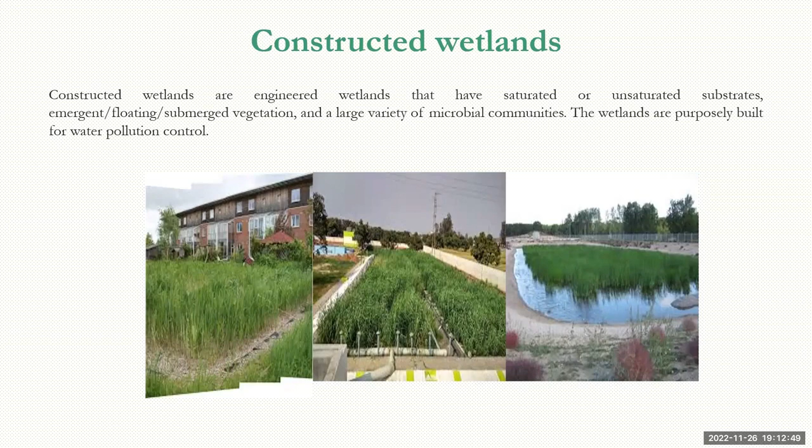So here I'm showing you some examples of constructed wetlands. These can be classified into 3 groups, but I will talk about it actually in 4 groups. So number 1 is vertical flow, and number 2, horizontal flow, surface flow, and floating wetland.

Now this vertical flow and horizontal flow are defined as subsurface flow. Subsurface flow means wastewater is moving beneath the media, so you cannot see the flow of water. We will see, okay, it's a very beautiful garden, very nice, but if no one tells us, we will not be able to understand that it's a treatment system. Whereas in surface flow, we can see the flow of water, because wastewater is flowing above the media.

This is very similar to the natural wetland that we see here in Bangladesh, or maybe in other parts of the world. And a very new system is floating wetland. Here the wetlands float with the help of an air buoyant mat, so that the mat floats on water, and the roots grow inside the water column, and bacterial removal occurs in the root. So basically, there are 3 types of wetland: subsurface flow, that is vertical and horizontal, then surface flow, and then floating wetland.

Now this vertical flow, why do we call it vertical flow? Because wastewater flows vertically through the media towards the outlet, meaning wastewater is flowing under gravity. That's why we call it vertical flow. Whereas in horizontal flow, wastewater flows horizontally in saturated media, the media will be totally saturated, so we call it horizontal flow wetland.

Okay, so now I will talk about a few of my research works that I have done in the last 10 years. First of all, I will talk about the conventional treatment systems. These systems, vertical, horizontal, surface flow, floating wetland, these are conventional. They have been introduced 2 decades ago, or maybe 3 decades ago. So we have implemented these in Bangladesh.

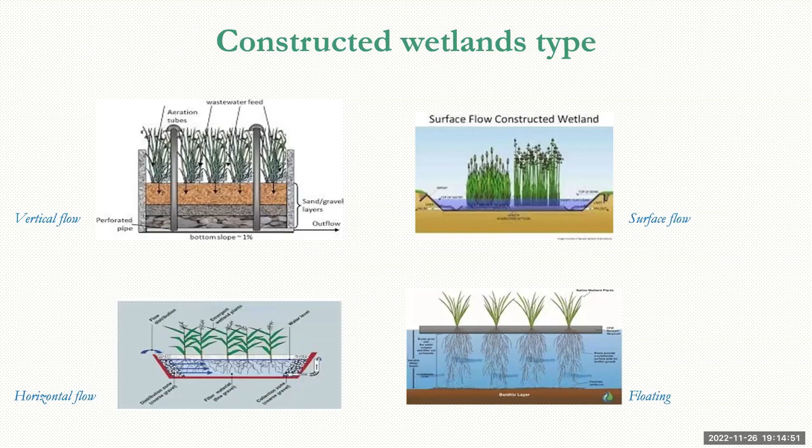This is the first reported study of a wetland system in Bangladesh, published in Chemosphere in 2012, a decade ago. We treated tannery wastewater. We all know tannery effluent is very harmful—it destroyed the river Buriganga. It's very difficult to treat because the chemical and bacterial composition is so complex.

Even traditional systems like the activated sludge process require very intense monitoring for successful treatment of tannery wastewater. This work was done in 2011 when I was at Ahsanullah University. We employed a 3-stage system: first vertical flow, then horizontal flow, then vertical flow again. The media selection is very important because it fosters the growth of microorganisms, absorbs and filters pollutants, and promotes plant growth. Many complex mechanisms occur inside the wetland system.

We considered coco-peat, or coir, a waste product. For the horizontal flow wetland, we used cupola slag, a waste product from the iron industry, and then pea gravel, small gravel available from construction sites in Bangladesh.

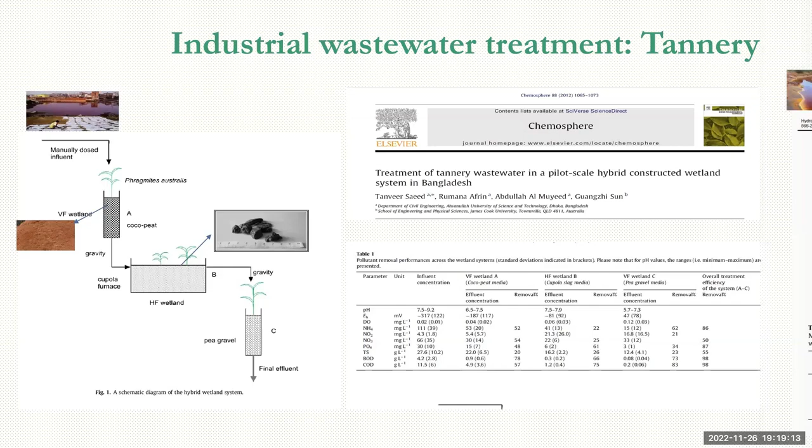Our next study, done while I was at Ahsanullah University, focused on textile wastewater, another dangerous effluent. The main component of textile effluent that destroys the environment is dyeing and coloring compounds. This work was published in Bioresource Technology.

Here we again employed vertical and horizontal flow wetlands. In the vertical flow wetland, we used sugarcane bagasse, a waste product—akhet chobra. In most of my research, I focus on waste products, turning waste into reuse, waste into resource, so it becomes a resource for removing contaminants.

In the following horizontal flow wetland, we used Sylhet sand, a very cheap material found at construction sites. Again, the results were very promising.

The ammonium concentration in the textile effluent was 158 milligrams per liter, COD was 12,625 milligrams, and BOD5 was above 2,705 milligrams per liter—absolutely lethal. The effluent discharge criteria under the ECR 1997 guideline for inland water bodies is about 40 milligrams per liter for BOD. There's no comparison between 40 and 2,705 milligrams per liter.

The interesting thing is, in one system we use recycled brick, that is, brick from a demolished structure. We resized it according to our requirement and used it in one system, and in another system, sugarcane bagasse. We found that the recycled brick produced more promising results than the sugarcane bagasse, because the recycled brick has many chemical components. We will see this later in the EDS analysis.

We have the EDS analysis, but due to space restriction, I couldn't show it. It has many chemical ingredients, for example calcium, aluminum, iron. These elements promote the adsorption of phosphorus, and also these media are very porous and rough, so they promote the growth of bacterial surface. We will see this in the SEM analysis later. So this is a very effective media.

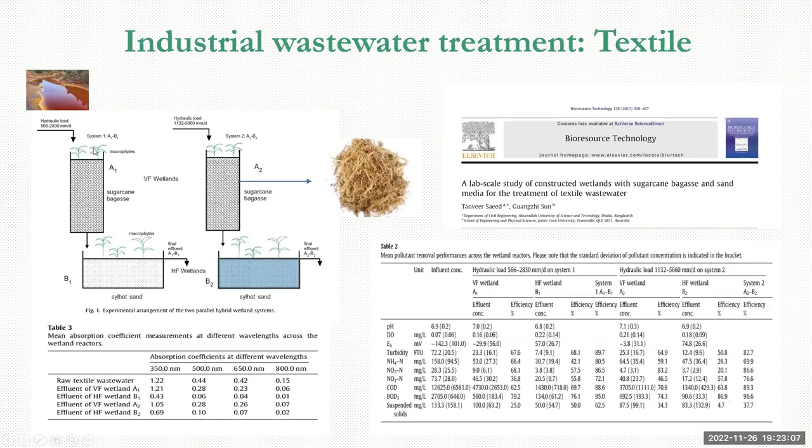And here we have used Canna indica plants. In the previous two research works, we used Phragmites, a very common plant we find in Bangladesh. The results are again very promising. We have achieved almost 80 to 85% removal from the industrial wastewater.

If we look at the effluent concentration, the COD effluent concentration was 1098 milligrams per liter, whereas it reduced to, in this system, from the first to say 184 milligrams per liter, almost 75% removal. So very good removal. And again, another dangerous pollutant, total nitrogen, was 17.3 milligrams.

But at the end point, in this system with the recycled brick, we got 3.4 milligrams per liter. Color removal was also sufficient in terms of platinum cobalt. Color was 1197 platinum cobalt, and at the effluent it was 209 platinum cobalt.

So this research bridges structural engineering and environmental engineering, because brick is a structural product. Civil engineers consider brick as a structural element, but here in this research, we have shown that the structural element can also be used in the environmental division. So it bridges the two divisions of civil engineering.

Now we will talk about floating wetland. In our previous three research works, we talked about subsurface flow, that is vertical and horizontal flow wetland. But there is another form of wetland, that is floating wetland.

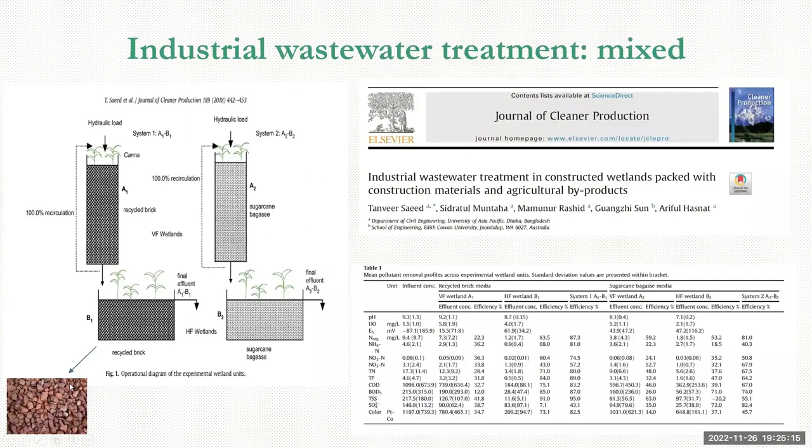So actually, this root acts in lieu of media in the floating wetland, and the whole system is floating. That's why we call it floating wetland.

This floating wetland is very applicable for Bangladesh, particularly for industrial wastewater treatment, because we know industries dispose wastewater that comes through a channel and then meets the river. If we put the floating wetland barrier in those channels, it will reduce the pollutant before it goes to the river. And we know that river has a self-dilution capacity. Once the pollutants have been reduced, the river, due to its natural capacity, will remove the remaining pollutants.

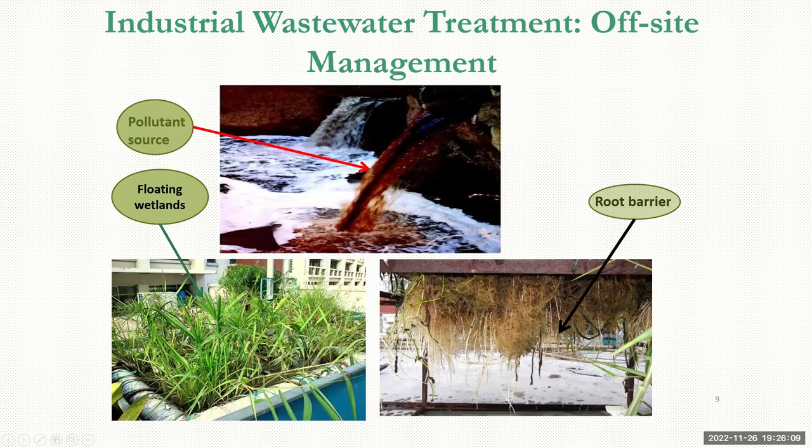So this could be a very attractive option also to treat our polluted lakes, for example Hatirjheel or other lakes. And here you see the bulk root zone, the growth of the root and the plant on the mat.

We also implemented this floating wetland in 2015. It was published in a very prestigious chemical engineering journal. Its impact factor is now almost 17.

So here, what we did is we constructed a very large concrete-built tank and filled it with river water collected from Buriganga. Then every week we collected water from Buriganga and dosed it here.

This was the initial system, and this is the very matured system. The root growth of the initial system was very small, and look at the matured root growth here.

So what happened here? Again, we see the ammonium concentration in the Buriganga river was very high, 50 milligrams per liter for a river. That's not good. And the effluent, after treatment, was 4.4 milligrams per liter. So all here I have shown, it's a very complicated table, but it has shown promising removal of contaminants from the polluted surface water.

But again, we cannot put it in a river because the river is vast. But what we can do is put it in the canals through which the industrial wastewater passes towards the river. So this is an example that the floating wetland could also remove the contaminants from the polluted surface water.

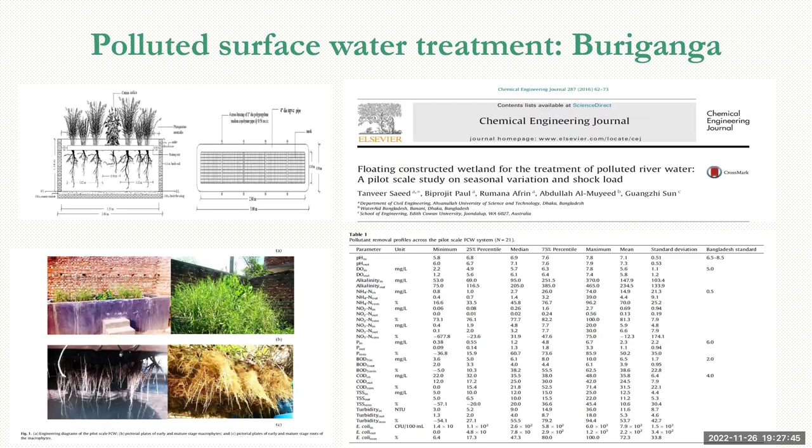Another work we have done in 2019 in the Journal of Environmental Management, we have treated wastewater from Hatirjhil Lake. Here, these are the first stage vertical flow. But the second stages could be easily applied to the polluted lake, for example surface flow or floating wetland.

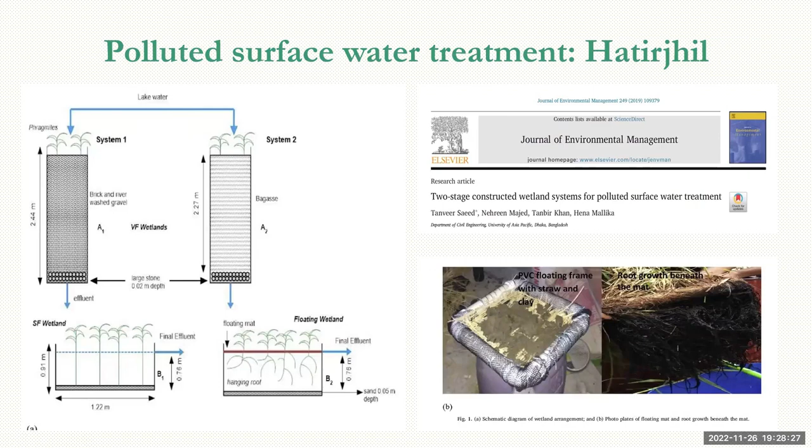And this is the initial mat that we constructed for this floating wetland, and the root growth after the experiment ceased. We have gotten promising results from these. As far as I remember, most of the pollutants met the guideline for inland water bodies, ECR 1997.

Now we moved to a very ambitious wastewater, that means landfill leachate. What is landfill leachate?

We know that every day millions, or maybe 1,000 tons, of solid waste are produced from each city corporation or maybe from Paurosabha. All these wastes are compiled in a vast area, managed by the city corporation or the Paurosabha.

When we compile the waste, due to rainfall or the drying process of the solid waste, the liquid portion of the solid waste comes out, and that we define as leachate. This leachate is one of the most dangerous wastewaters in the world because it has very high pollutant concentration and is very difficult to treat due to its imbalanced chemical composition that doesn't support the growth of microorganisms in any treatment plant. So this was our first study with landfill leachate.

Here we have used 3 parallel stage wetlands, and again the media in the wetland system differs. The first one is gravel, that means normal stone, and this one is very interesting - this wetland was filled with steel slag, the byproduct from steel industries, and concrete block. That means concrete; we know our buildings are made of concrete, so we use that concrete.

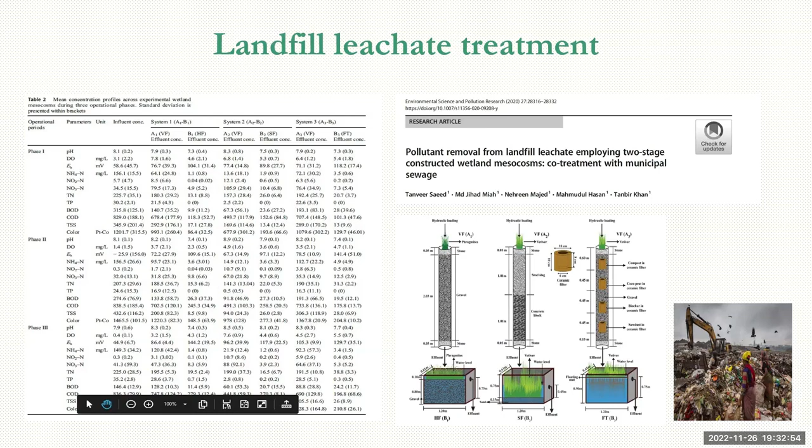Okay, so again, we continued our journey with the landfill leachate, and this was a bit ambitious setup. This is a very complicated setup: 4 vertical flow first stage and 4 different types of horizontal and surface flow wetland.

If we look at the media, for the first system we used concrete, again reused concrete. This one is coal, organic coal. Organic media has certain advantages because it has carbon composition. This carbon composition facilitates the growth of microorganisms, particularly the denitrifying bacteria. It also absorbs pollutants.

Any organic media, for example coal, biochar. Biochar is another very good organic media that is now employed worldwide as wetland media, or maybe as filter media. Again, this is coco peat, and this is the brick. This is a very new thing that we used in our previous research in 2018. And these are filled with sand.

And this is the SEM images, which you see. This is the unused, fresh media, and these are the used, meaning we extracted it after termination of the experiment. In the unused thing we see rough textures, whereas in the used product, the SEM image, we can see a huge deposit of biolayer - that means formation of aggregate based material. It could be organic matter deposition, it could be deposit from plants, and obviously the growth of bacteria.

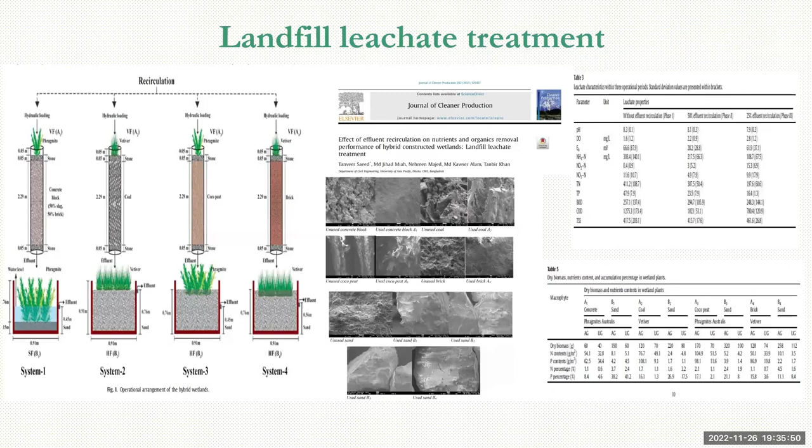But again, plant is very important - whether it's a wetland with plants, a filter media, or unplanted filter, we will define. So here, this is the same setup, but this is another publication, because here we analyze the major pollutants, but here we analyze the metals - 4 important metals, that is zinc, chromium, nickel, and lead.

Actually, metal removal in constructed wetland is totally physicochemical. For example, metals will precipitate in alkaline condition as hydroxide form, and also the media may adsorb metal because if the media has cations, for example calcium element, they will exchange with the heavy metals. Also, if iron is present in wastewater, it will deposit, and this iron or manganese deposit will also absorb metals.

And this is the EDS analysis of this media. Actually we have done most of this analysis in all research, but I'm showing you in this one too, because we do not have that much space. And we can see different types of cationic elements present in this sand or brick.

All these primarily contributed to metal removal through precipitation and adsorption; plant uptake for metals was negligible in phragmites or vetiver plant. With the bioconcentration factor or total translocation factor analysis, we found that metals mainly accumulated in the root zone, and that was also reported previously, because plants have some self-defense to prevent translocation from root to above-ground parts. But again, plants didn't contribute that much to metal removal.

So here what we use, we introduce baffles, that means dividing walls. So what is happening? Wastewater is coming, and due to the presence of the wall, it has to flow here, and again through the opening. So it is a zigzag flow, and we are using the whole media.

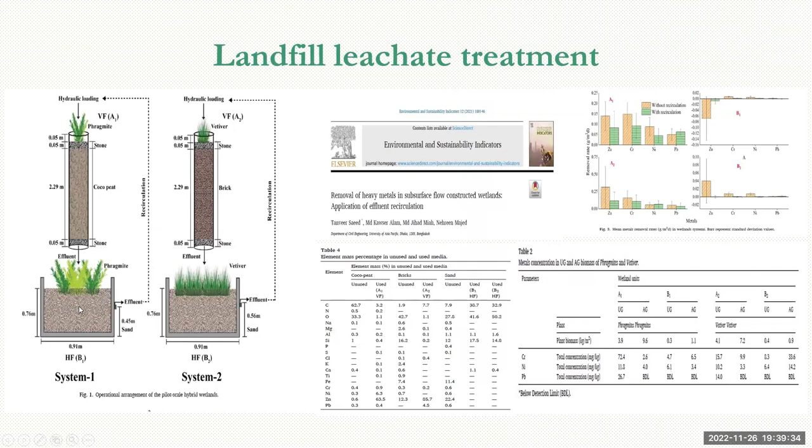Similarly, in the horizontal flow wetland also, due to the presence of baffle walls, the water is flowing through the media. Whereas in the traditional system, water is coming and maybe it flows this way or that way. We cannot control it because there is no control structure.

Again, if we see the pollutant concentration of the municipal wastewater, this was collected from Tejgaon near Hatirjheel. Look at the COD concentration, 4,048 milligrams per liter, obviously because it contains textile effluent from Tejgaon industry and other industries, along with domestic wastewater. And this is going into the Hatirjheel, polluting the lake water.

I have told the authority many times. They told me, okay, we will do something, and eventually nothing happened.

So ultimately this is the final effluent of the 3-stage system, that means the effluent produced from the surface flow wetland. If we see the COD concentration, the influent concentration of the municipal wastewater was 4,048 milligrams per liter, and the effluent was only 223 milligrams per liter. So almost 94% overall removal, and also ammonium and other pollutants showed very promising removal.

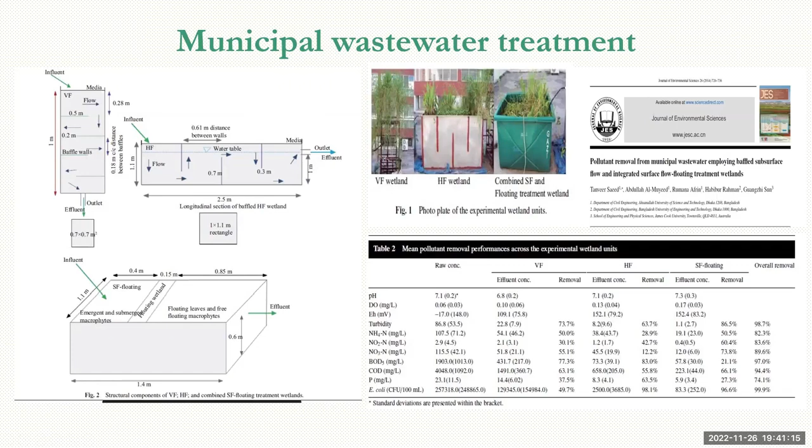So in this study we showed that if we use flow controlling structures, we can improve the pollutant removal performance of the wetland system, because now we can force the wastewater to pass throughout the media.

So this is another municipal wastewater treatment system. As I told you before, this is a new system. We have inserted pipes, you see pipes, this is the cross section. If we see the top section of this system, we have inserted several pipes. So what is happening? Wastewater is flowing through the pipes.

So we are forcing the water in a certain vertical direction. We are not allowing free movement, we are forcing it. And here we used mortar, meaning the material used on brick walls for painting. Our university was undergoing a renovation process and they produced a huge amount of mortar. We collected it, crushed it, and used it as our main media in this system.

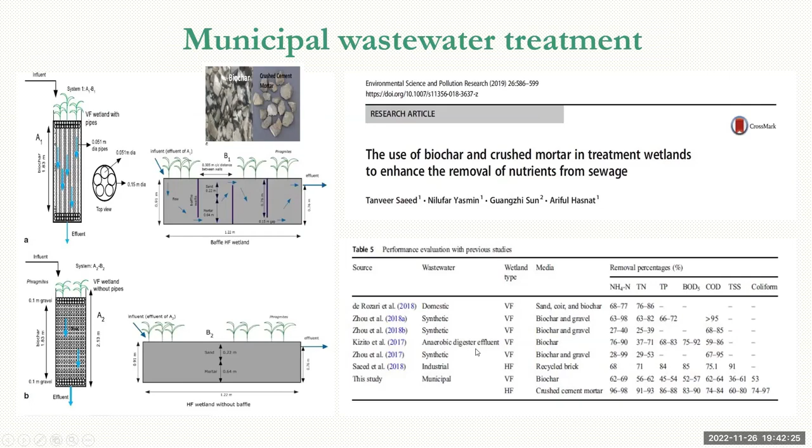And we have got promising results in this study when compared with other systems conducted worldwide. So here, almost 90% removal.

Now this is the interesting part coming up. Novel, meaning a very new treatment system that has been recently introduced. Number one is tidal flow. It's a very new system introduced worldwide. Tidal flow system means it is operated under 4 conditions.

First of all, suppose this is a wetland, it is dry, there is no wastewater. We will fill it, meaning the media will be fully saturated. We call this the fill period. During the fill period, the media will adsorb the pollutants, for example ammonium, phosphorus, maybe metals. We define this period as the contact period, when we keep the whole media saturated.

After the predefined contact period, which can be 1 hour, 2 hours, 24 hours, 36 hours, maybe 10 days, depending on how we design it, we will drain the entire wastewater from the system. We call this the drain period. Then it will be kept unsaturated for a certain period, which we call the rest period. So these 4 sequential protocols, fill, contact, drain, rest, contribute to pollutant removal.

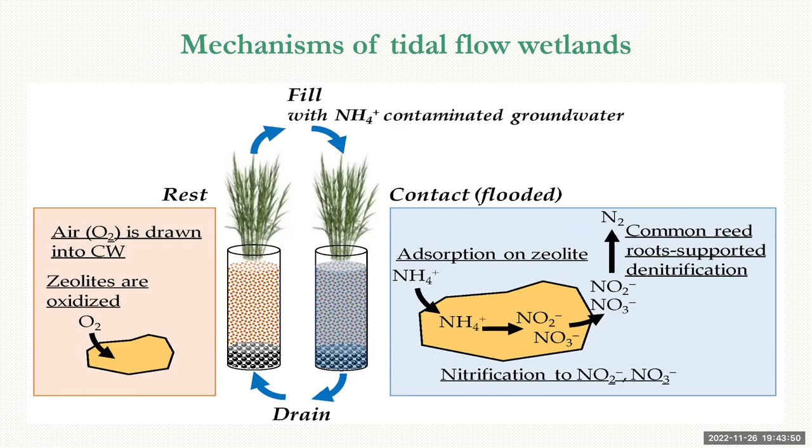But I'm not saying that we can implement it in a traditional treatment system, because it requires very sophisticated arrangement. If we have that sophisticated arrangement, we can reduce the amount of land and go for this system. And these are all single stage, meaning unlike the 2-stage or 3-stage systems we saw earlier that consume more land.

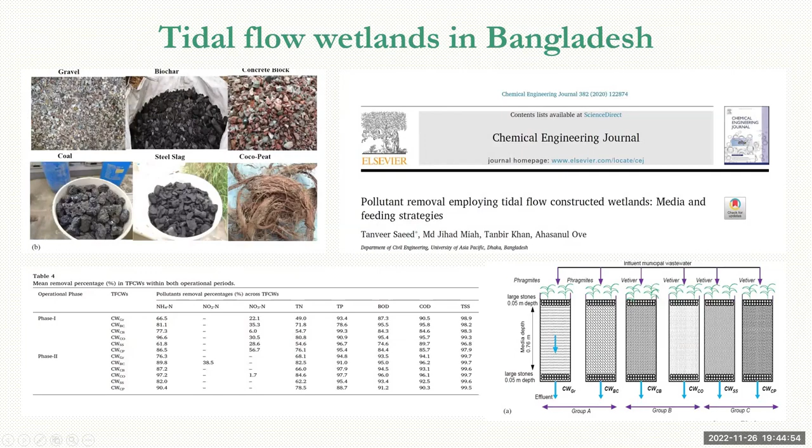But here we have got very high results using only a single system. So this is a promising system that can save the consumption of land.

Now, a very recent system, that means microbial fuel cell wetland. Wastewater will be treated and simultaneously energy, bioelectricity or bioenergy will be produced. How do we produce bioenergy?

This is a conventional wetland system with media and plant. It can be any plant. We will integrate electrode, that means cathode and anode. Any electrode that will conduct the electron. It can be steel, copper, etc., or maybe charcoal, whatever.

So what will happen? Organic matter will be degraded here in the anode. This is the anode zone, and this is the cathode zone, and we separate it by foam. This cathode zone is aerobic, and this anode zone is anaerobic. That's why we have put foam. Otherwise, roots will come inside the system and destroy the entire system, because roots also pass some oxygen. So the anode zone must be anaerobic, meaning no oxygen will enter.

And what will happen in this anode zone? Electrogenic bacteria will degrade BOD or organic matter, that means BOD and COD, and they will produce electron. This electron will be captured by the anode plate and transferred through the external wire and resistor to the cathode plate. In the cathode plate, there is oxygen. So in presence of oxygen, the circuit reaction will be completed and energy will be produced that can be detected by a multimeter. It's a very promising system, and this system is now gaining attention worldwide because of renewable energy production.

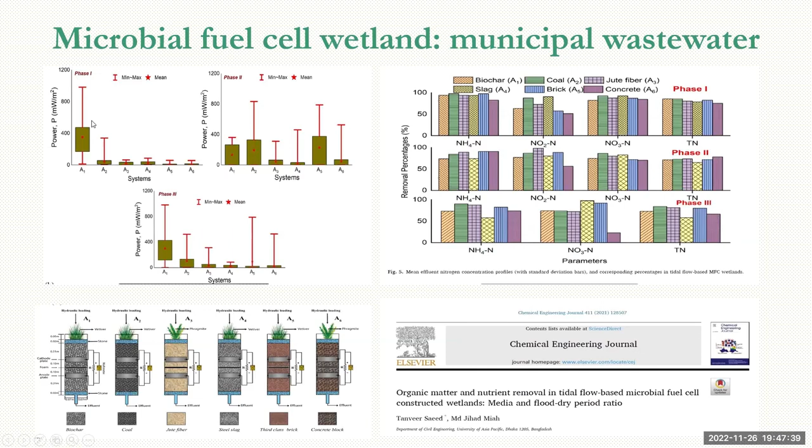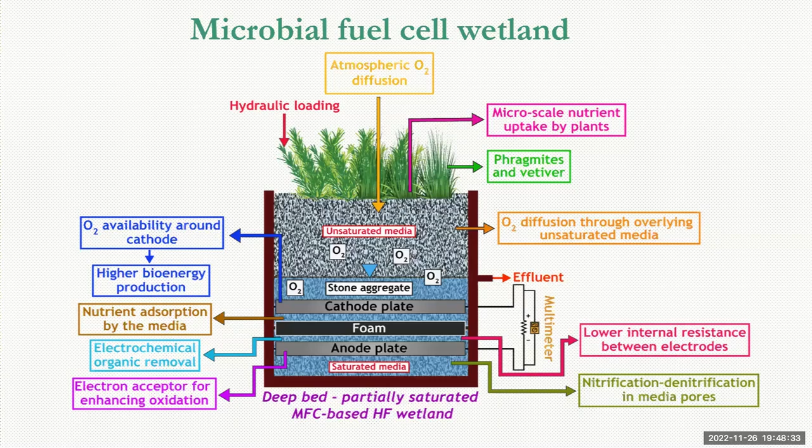This is the normal system, and this is the bioenergy producing system. We have compared these two systems. We have found these systems are very interesting, and we have integrated this tidal flow approach here. We remember this tidal flow - fill contact drain rest. So both this system and this system, these are tidal flow systems.

But here we have also integrated electrode, and with these equations we have shown how the pollutants are biologically removed in the wetland system. So these equations, we hope, would formulate the mathematical modeling segment of these wetlands, because these are very new systems - no mathematical models were proposed until this research.

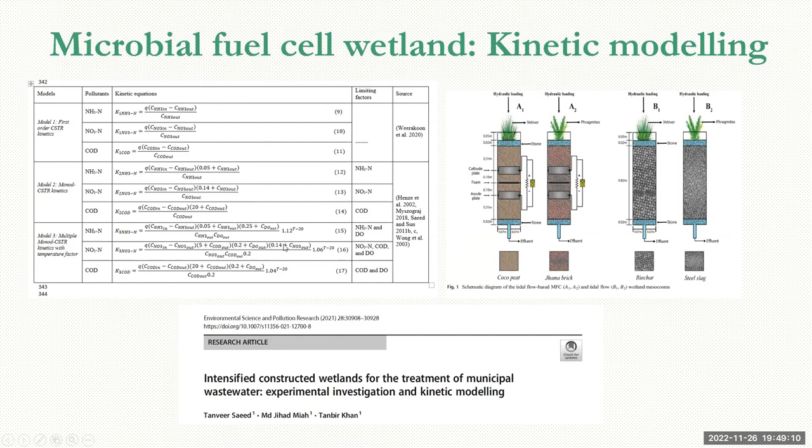What we did was intermittent loading. That means, for example, our daily dosage volume was 5 liters, so we divided it into 6 or 7 parts. Each time we applied a small amount of wastewater so that the chemical composition doesn't destroy the anode environment, and it worked. This research also showed that microbial fuel cell wetland can be used for high strength wastewater treatment, provided that we use intermittent loading. But if we apply the whole load altogether, it will destroy the anode chamber, as reported previously.

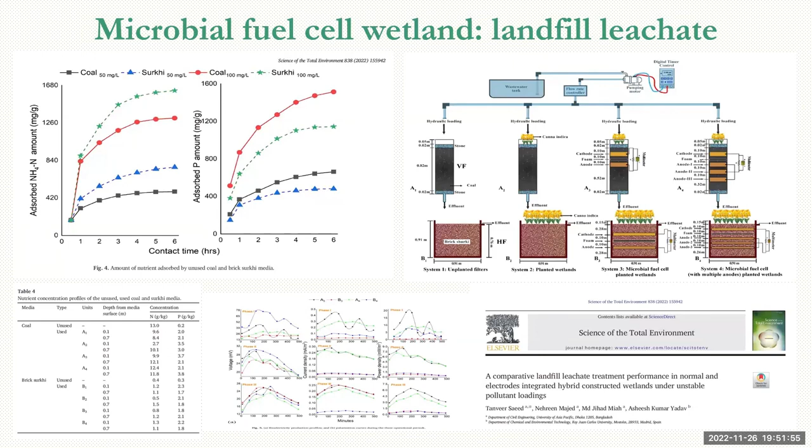Now, a different aspect: sludge. Sludge is the product or residue we get from a treatment plant or septic tank. Any such residue is considered sludge, and this is very dangerous because it has high water content and huge chemical and organic nitrogen or metal content. You cannot dispose of it directly, as it will pollute the environment. So this is the overall sludge treatment mechanism of a wetland system.

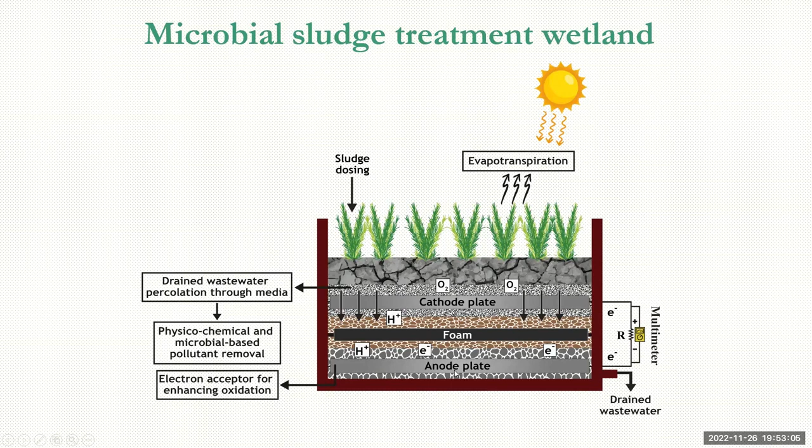Here I am showing you the microbial fuel system, but the wetland system is similar. When the sludge is subject to a drying period, evapotranspiration through plants reduces the water content, and root growth creates cracks that increase drainage of the wastewater, which is then treated by the underlying media and bacteria, along with physical and chemical absorption. So it's a very complex process.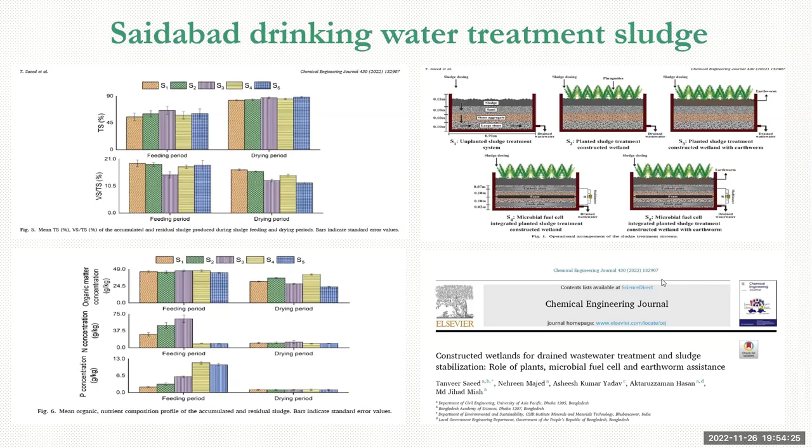A very interesting research project we are conducting now is septic tank sludge treatment, funded by the Bill and Melinda Gates Foundation. We collected septic sludge, human waste, from septic tanks and treated it here. I'm not showing you the results because we are writing the manuscript right now, so we cannot show the results yet. Hopefully, after it is published, we can show the results.

Look at the end product we have produced. We undertook detailed chemical analysis, for example metal and all types of analysis, and found that the products from this system meet the agriculture guidelines published by the DOE as fertilizer, in terms of metal, solid, and organic nitrogen ratio. But I will emphasize that we need to improve this guideline, because human waste from septic tanks may contain antibiotics, since people frequently throw medicine into their basins, which goes into the septic tank. This guideline needs to include that aspect. We have not measured antibiotics due to a lack of measurement protocol, but maybe in the future we hope to.

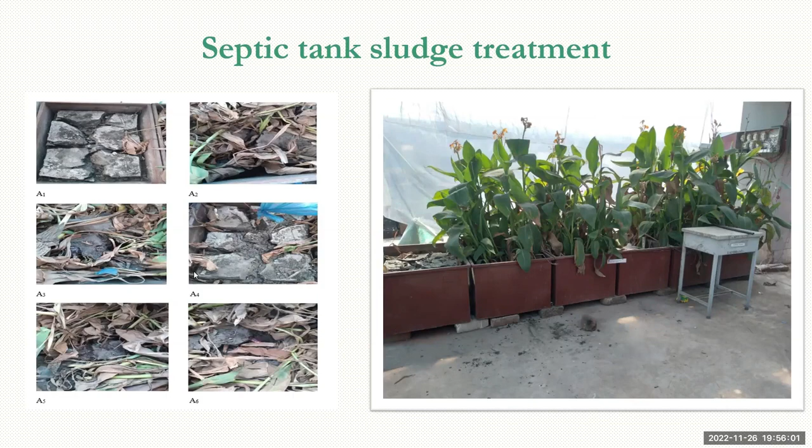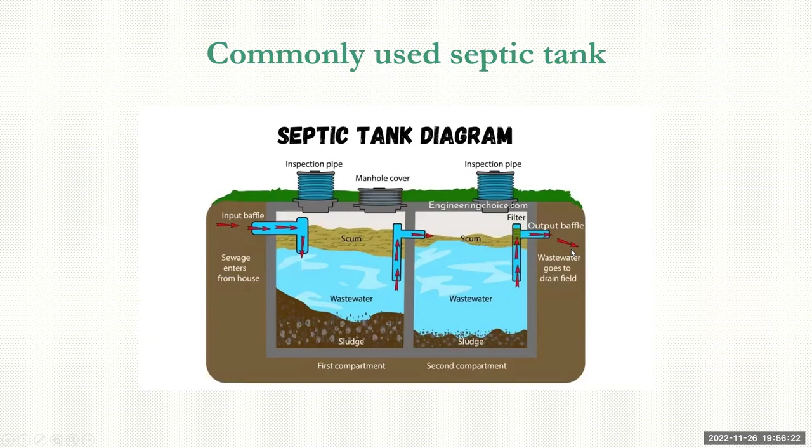Now, our last topic: decentralized wastewater treatment, meaning septic tanks. The main problem here in Dhaka is that we use two-chamber septic tanks, which is a partial treatment system allowing only sedimentation and filtration. So the wastewater coming out is only partially treated, which is very dangerous for the environment.

With funding from WaterAid, we developed this bioreactor septic tank so that pollutant removal occurs in the biowalls and sludge before the water eventually comes out. This system actually exists in a school in the Mirpur area, constructed by WaterAid and us. We have gotten very promising effluent from the septic tank: the influent BOD was 152, and look at the output BOD, 0.7 milligrams per liter.

It's almost very suitable for reuse purpose. Also ammonium is 30.6, and from this effluent we get 1.1. So this is very promising and can be easily applied. We hope it may reduce the current environmental pollution in Bangladesh.

And this is the SEM image of the media we have done, showing very intense growth of bacteria.

We have also integrated a wetland with this system. This is an experimental system, particularly for the schools in Purosabha because they have land. And we have got promising results, which are published here.

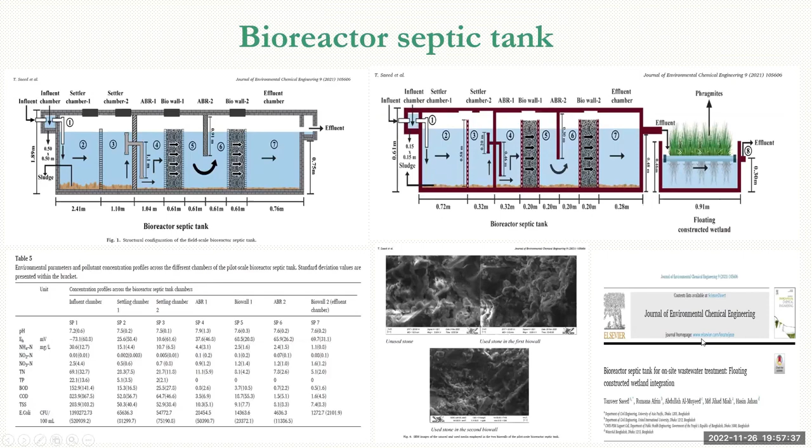In the last 2 years, we have implemented some floating wetlands in Dhaka, at Dhaka WASA's Saidabad treatment plant intake. Our main objective was to purify the intake wastewater so that it reduces the load on the Saidabad treatment plant, because that treatment plant is overloaded as they extract water from Shitalakhya.

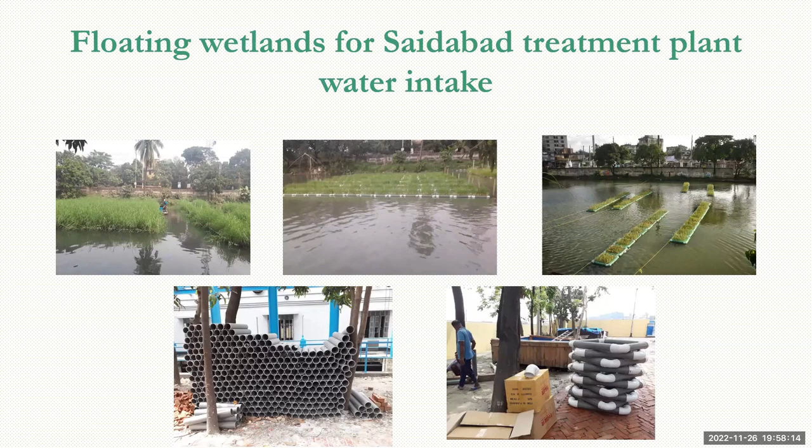For the last few slides, our experimental setup - these are our experimental setups at UAP, different types of systems, currently running.

This is the look of the sludge treatment system. This is the unplanted system - water percolates very slowly here due to the absence of plants.

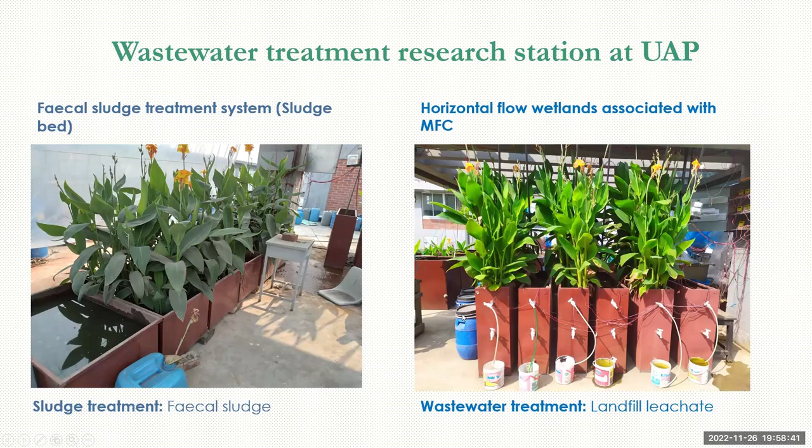And some very complicated systems with pumping and timer-controlled pumping to dose water. This is the bioreactor septic tank that will produce electricity.

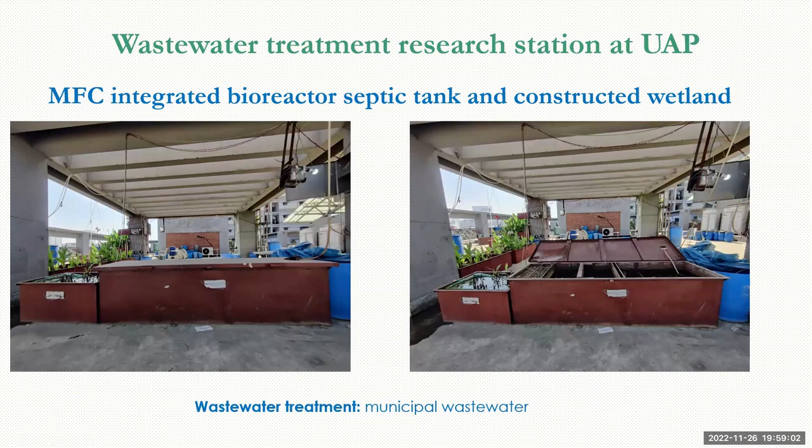This research is going on under another grant from the Bill and Melinda Gates Foundation and ITN-BUET. And this is the voltage production setup - some very complicated connections, with all voltages coming from this setup.

Thank you, I think I have finished early.

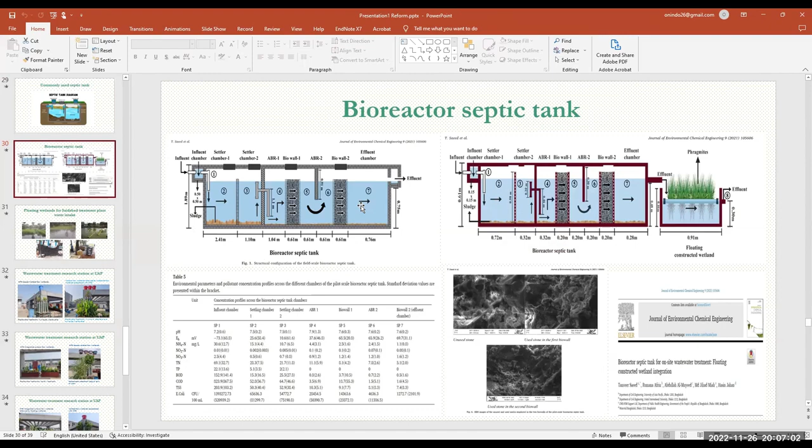The common plant we have used in most of our early research is phragmites. This is the most commonly used plant worldwide because it can tolerate wastewater. But I have seen that phragmites has certain disadvantages - for example, when you put tannery wastewater or leachate wastewater, it dies because it cannot withstand the exceptionally high nutrient load of this wastewater.

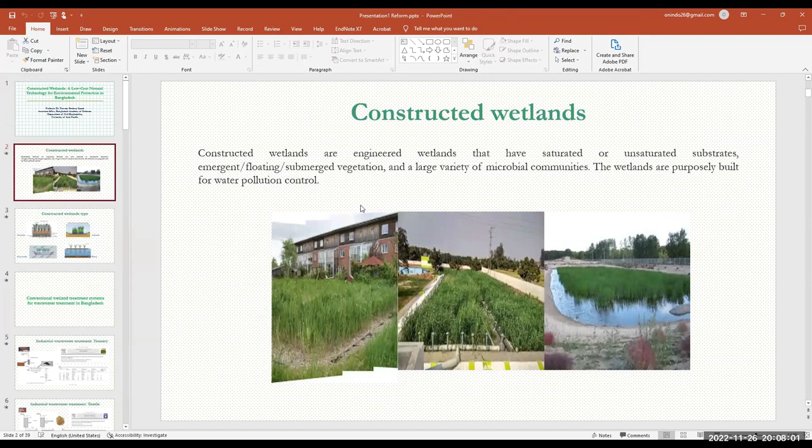Another plant introduced - I think the Department of Civil Engineering at BUET is undertaking research with this plant - is vetiver. I think it grows in Gazipur or somewhere in that area. I sent my students, they searched a lot, and in a certain place they found vetiver. The advantage of vetiver is it tightly holds the soil. So the Civil Engineering Department at BUET has widely implemented vetiver for slope stabilization in the Chittagong hill tracts, and they have been funded by different organizations in Thailand.

But in the wetland system, we have also used vetiver, and again the same problem exists - when we put high strength wastewater, it dies. It turns yellow slowly and eventually dies. But another interesting thing is, although the plant died, we found that the wetland continued functioning because bacteria had grown inside the system.

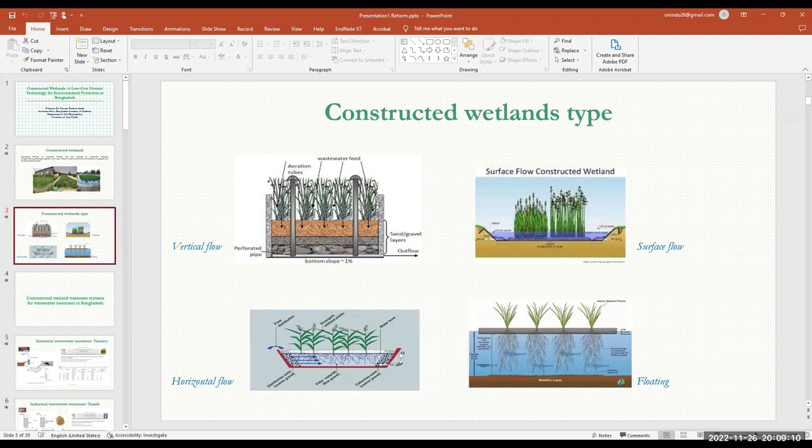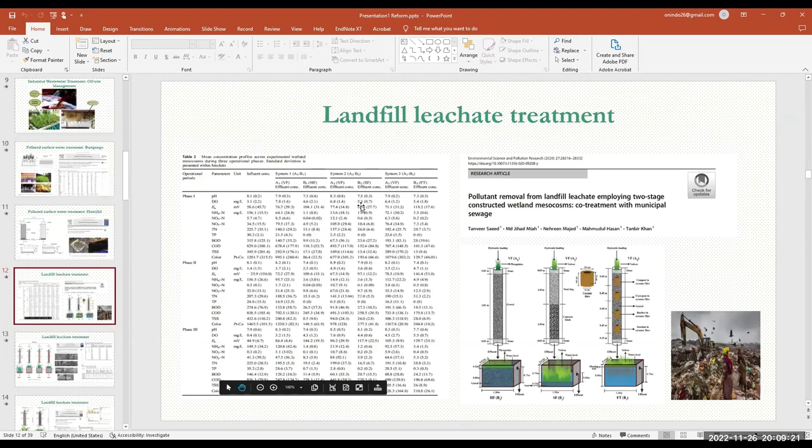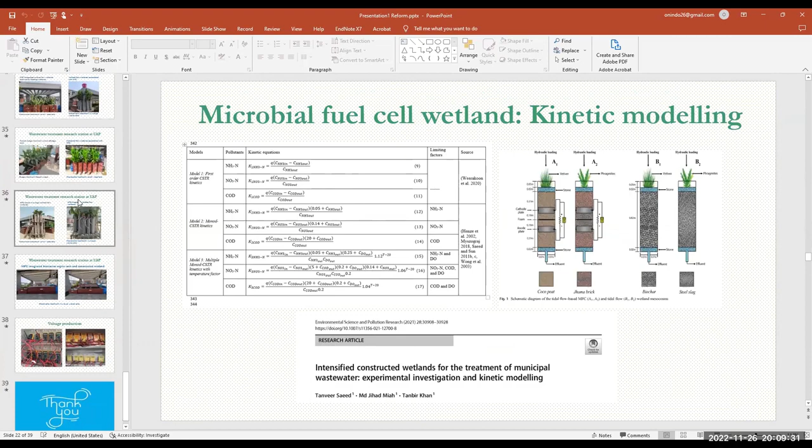Another plant my teammates are researching is Canna indica. This plant can withstand huge pollutant loads. But again, this is very interesting because we do not know whether these Canna indica plants have been mutated or not - we need to analyze this plant because we do not understand why they grow enormously in such a polluted environment. They have grown enormously in the fecal sludge system.

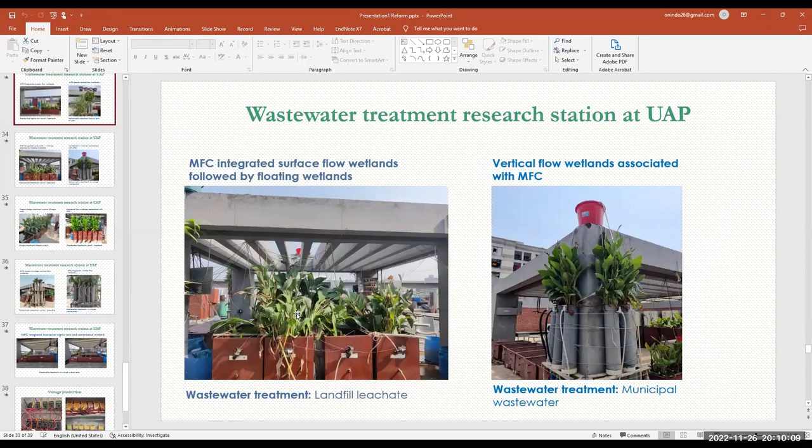And again, you see this is the landfill leachate - when the phragmites died, the Canna indica continued their growth. In this system you see the phragmites here, they died, but look - the Canna indica were growing.

We are now undertaking some research with the Department of Soil, Plant and Environment on this, because I'm not a plant specialist and my main concern is the removal going on inside the system. But we also need to identify the particular strength of this Canna indica plant, because it could be a robust plant that can withstand the shock, the high pollutant load, and the ammonium concentration. But it requires some findings and we require some time.

To make some conclusions about this particular plant: some other Canna indica plants we collected from Dhaka nurseries didn't grow that much, but these have been collected from Khulna, and they continued their growth. See the flower here; they have continued their growth.

So this is another topic that we are now researching about.

She was asking again whether you have any plan to use Kusuripana, I mean duckweed, in the floor. No, we have not used duckweed because duckweed has some problems.

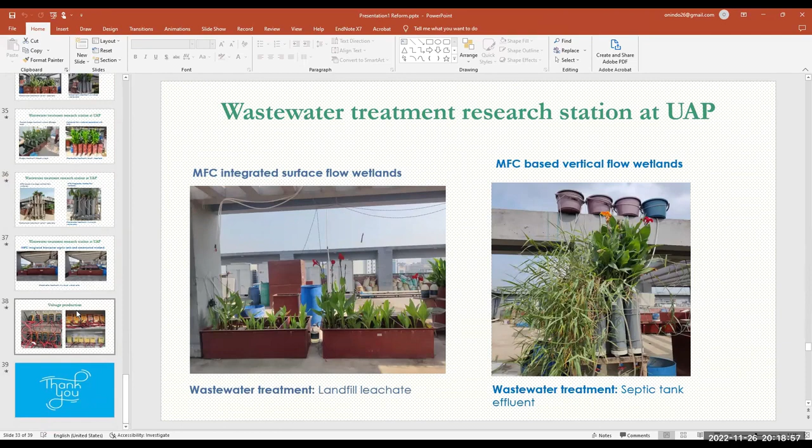And I have another question, and this is the last one, and that is I would like to know from you the role of constructed wetlands in circular economy, because we have to think in a holistic way and how it would contribute to the whole economic process. I just want to know from you.

Those were very non-technical. Thank you very much. Thank you, thank you. Regarding your first question, the wetland, sludge treatment wetland, that means they have been already implemented

In defined Pourosabhas, for example Sakhipur Pourosabha, Saidpur Pourosabha. I think now in total 150 sludge treatment systems exist. What they're doing is collecting the fecal sludge or human waste, putting it in and treating it.

But the main problem is they do not know how to manage the overall sludge production, because our main objective regarding the second objective, circular economy, is we should produce fertilizer from this, because human waste is also a great source of fertilizer if we correctly process it, since we have to remove the coliform concentration.

So the municipalities now have implemented many sludge beds. And also, in the Rohingya community, all the NGOs are now treating the waste produced from the Rohingya community with this wetland system. Otherwise, the ocean would have been polluted right now. So it has already been implemented.

But now the question is regarding circular economy, how we can produce manure or fertilizer from these septic tanks or fecal human waste sludge treatment systems. This is the research that I am now undertaking, and alhamdulillah, by the grace of Allah, we have found some promising results about how we can produce fertilizer that can meet the guideline published by the ECR or Department of Environment. So we are working on this aspect, that means circular economy.

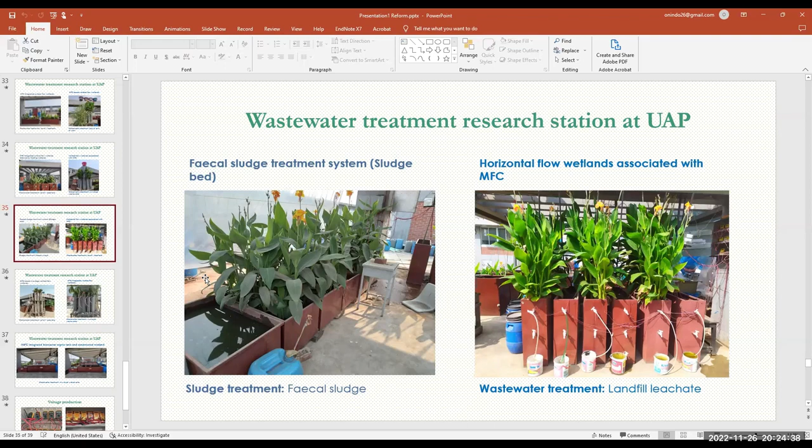Thank you very much for your nice questions. Actually, for reducing the cost, we have focused on rejected materials. For example, I've shown you recycled bricks, sugarcane bagasse, or concrete mortar. All these are abundant, or thrown away as waste products. Let me give you an example: we have used jhama brick, meaning brick that is overburned in the brick industry. Every day tons of jhama bricks are produced and thrown into the environment because people don't know what to do with them. We have used it as media to purify wastewater. That's why I focused on waste material to reduce the cost, because media is a substantial cost, and if we can procure waste material, it will substantially reduce the cost. Another cost is the plant—obviously Canna indica is a cost.

Dr. Professor Tanveer, you are absolutely right, but ultimately whether your research will be replicated depends on cost-benefit analysis. So have you thought of that issue? That is my query. It has already been— not that... I have seen that all along you are using waste products. But the issue is whether at any point you have thought of costing and placing your proposal to the authorities, because this is a burning issue for Bangladesh, and your research findings are fascinating. So I think as a nation we need to do something about our water and our air. I think it's high time we should replicate some of your research findings.

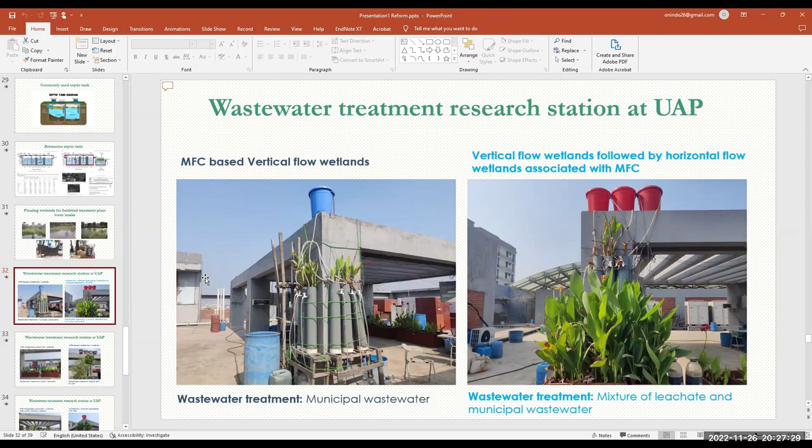Thank you. Already 150 real-scale sludge treatment wetlands exist in defined Poroshobas, like Saeedpur Poroshobha and Sakhipur Poroshobha in Chittagong. So it has been replicated—people have adopted my idea and implemented it for sludge treatment. The Bill and Melinda Gates Foundation, with the Department of Public Health, is working to implement these wetlands for fecal sludge treatment, and they are also waiting for the outcome of the sludge treatment system I'm now undertaking, because we have to modify the design equation since some problems exist in the current sludge treatment method. Regarding wastewater treatment, we have already implemented it.

If I can show you, in the Saidabad drinking water treatment plant—this is the main treatment plant that supplies drinking water in Bangladesh—and this is the intake; this water goes to the Saidabad treatment plant. Almost 300 floating mats were implemented by WASA, and the results were coming good. But I don't know, throughout 2020 we worked together, but from 2021 they disappeared. I don't know what happened—they simply disappeared.

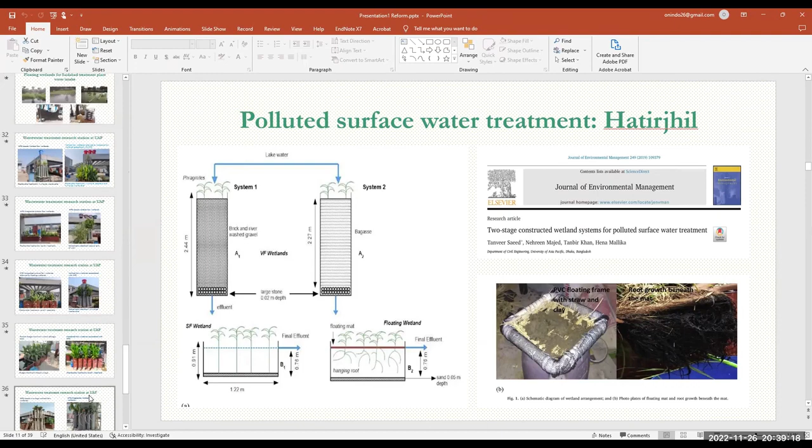এই ম্যাট পরে ডিকম্পোজ হবে, কিছু মেটাল রিলিজ হবে। কিন্তু আগেই বলেছি যে প্ল্যান্টের আপটেক টোটাল রিমুভালের চেয়ে অনেক কম। মেইন আপটেক হচ্ছে নাইট্রোজেন, ফসফরাস, মেইন রিমুভাল হচ্ছে ব্যাকটেরিয়াল। এখানে যেহেতু কোনো মিডিয়া নাই, প্ল্যান্ট আপটেক হবে, কিন্তু গ্রোথ-ডেথ তো সবসময় হচ্ছে না, রিলিজও হবে। এটা আমাদের পরীক্ষা করে দেখতে হবে। আমার অভিজ্ঞতা বলে আপটেক রেট ডিকে রেটের চেয়ে অনেক বেশি।

আমাদের ওয়েস্ট ওয়াটারে যে মেটাল থাকে, অন্য কোনো ওয়েতে যেমন অ্যারেশন করলে সেই মেটাল রিমুভ হবে না, ওখানে মেটাল থেকে যাবে। আরেকটা জিনিস, যেকোনো ওয়াটার বডিতে কেমিক্যাল ইউজ না করাটাই বেটার, কারণ কেমিক্যালের কিছু এলিমেন্ট থেকে যায় মেইন ওয়াটার বডিতে। সুতরাং কেমিক্যালের ব্যাপারে আমাদের একটু রেস্ট্রিক্টেড থাকাই ভালো এনভায়রনমেন্টাল প্রোটেকশনের জন্য। এটা খুবই জরুরি। নেচারে যতই কম কেমিক্যাল ইউজ করা যায় তত বেটার।